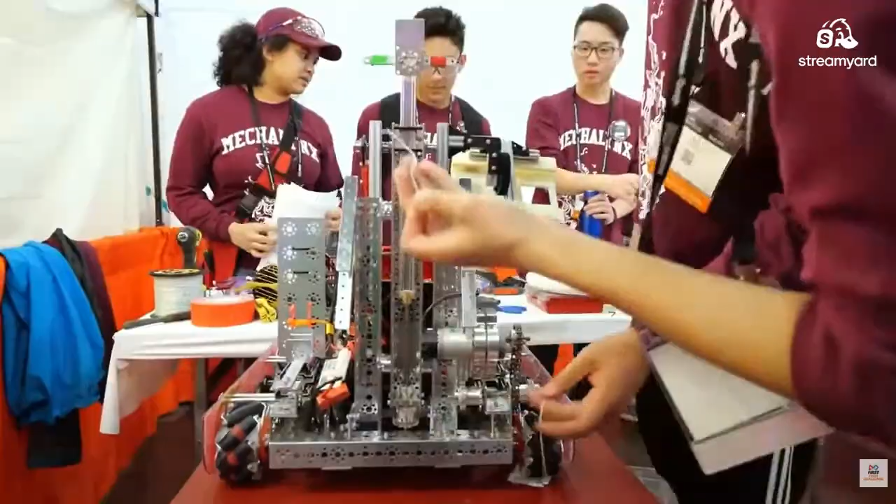Every year you also learn more and more about coding, so then your code's gonna get better and better. Personally, I do not learn hearing about it, but hands-on is just go into it. Instead of saying, oh, I know how to build this robot, I can say, I built this robot.

In First Tech Challenge, students are developing a broad range of skills: manufacturing, hardware, troubleshooting. But there's also a lot of things that you learn that you wouldn't necessarily think about, like people skills, problem-solving skills, helping one another, helping other teams.

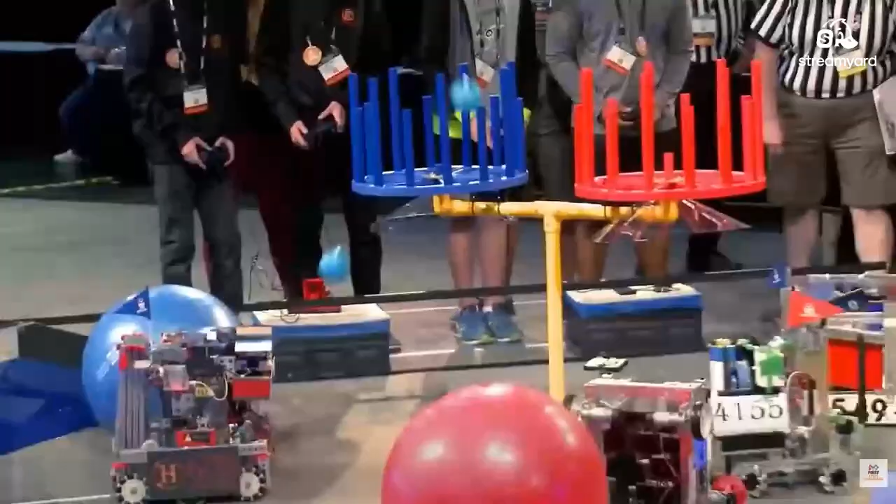The program draws so many students that come in who just want to do the marketing, who just want to do fundraising. And that's a great thing that the kids learn very early on. The model of FIRST has provided incredible opportunities for the students to interact with professionals.

Whenever I asked my mentors a question, they always flipped the question around and asked, where would you find the answer to that question if I weren't here? They slowly built my confidence up so much more to a point where we weren't asking them questions, we were just going.

Each team has to compete at a local event, win awards at the local event, and then they're able to move on to the First Championship.

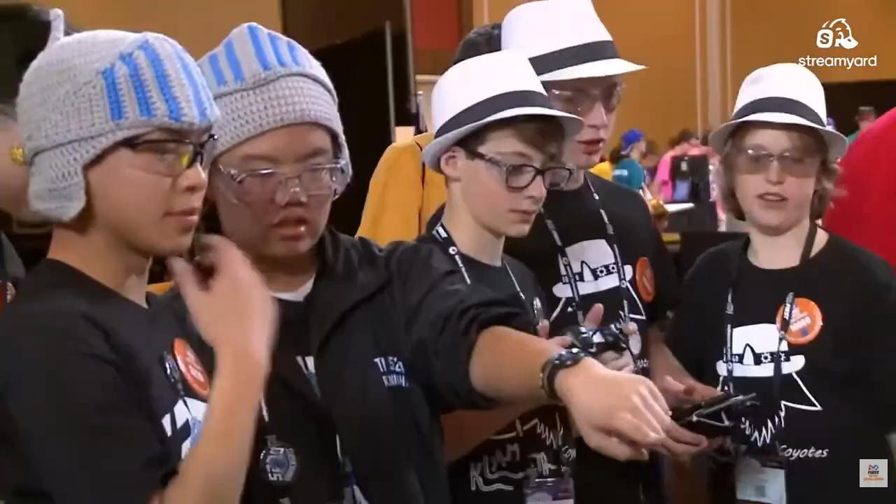You walk into the room and there's that smell. The smell of robots. There's different languages, different culture. It's just the best thing ever.

There are scholarships for colleges, universities, as well as technical programs. I think it's incredibly important for youth to see careers in science and engineering as a possibility for them.

First Tech Challenge is like an avenue for me to express my creativity with like-minded individuals that later become my friends through the program.

First, in one word: wow. Fun! First is inspiration. First is amazing. First is hope.

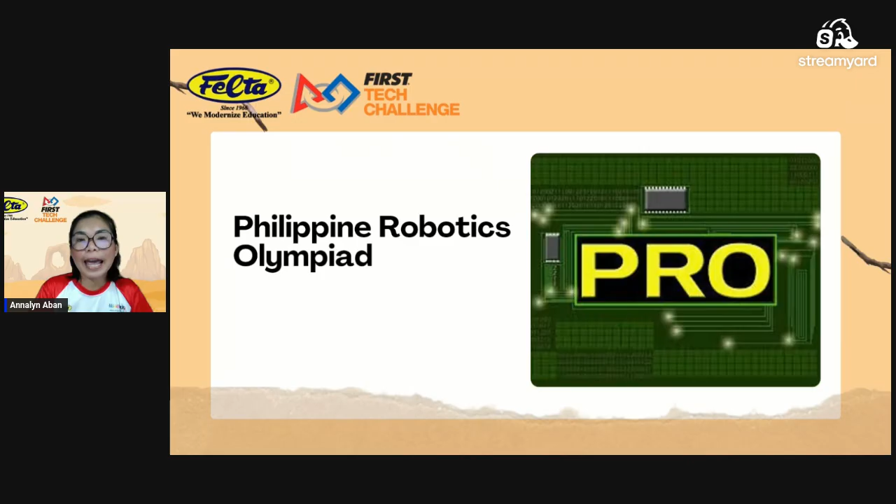Now, to help teams begin their FTC journey, we are also introducing the FTC starter bot for this season's team. We'll discuss that thoroughly later on. So it's bigger bots, but technically to start up, there is a starter bot as well.

Very challenging, but it's worth it. Yes, definitely po, it's true.

So, to help teams begin their FTC journey, because we're talking about bigger bots now, we will be introducing the FTC starter bot as well. Every year there is a season team, but later on we'll discuss that thoroughly. The starter bot that we're going to use, we'll showcase that later.

The starter bot serves as the foundation for teams to better understand the basics of FTC robot design, programming, movements, and game strategy. It's always designed to guide students and mentors as they explore the mechanics and engineering concepts behind the competition.

For new teams, the starter bot we're going to showcase later will provide an excellent starting point to learn how FTC robots are built and how they can be adapted to perform game tasks during the exhibition challenge. This initiative will support our goal of making First Tech Challenge more accessible,

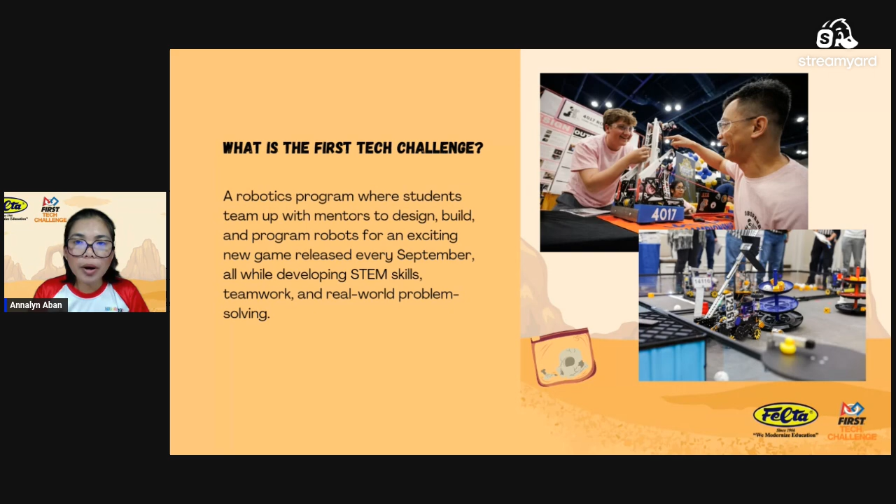In this First Tech Challenge, students are encouraged not only to create functional robots, but also to think critically. They need to solve real problems, communicate effectively, and collaborate as a team. Every season presents new challenges that push teams to continuously improve their design, strategies, and technical skills. Beyond the competition itself, FTC helps develop valuable STEM knowledge, leadership skills, confidence, creativity, and perseverance - skills that are important both inside and outside the classroom. Most importantly, FTC creates opportunities for students to learn by doing, to explore future careers in technology and engineering, and to become part of a global community of innovators and change makers.

So for the 2025 and 2026 season, teams around the world take on the challenge called Decode. It's almost done, but as I've mentioned, we just wanted to kick it off so that we could share it with the Philippine community. This season's game invites students to explore stories, discovery, and innovation connected to artifacts and human history through an exciting STEM and robotics experience - because it's Decode.

It was inspired by exploration and discovery, where teams work together to design robots capable of completing different game objectives while applying creativity, engineering, programming, and strategic thinking. Through this season, Decode challenges students to look deeper, to think critically, and to collaborate effectively as they solve problems inside the competition field. Teams experience hands-on learning while developing important skills in robotics. This year's challenge continues the mission of FIRST, where we want to inspire young people to become future scientists, engineers, innovators, and leaders through engaging and meaningful robotics experiences.

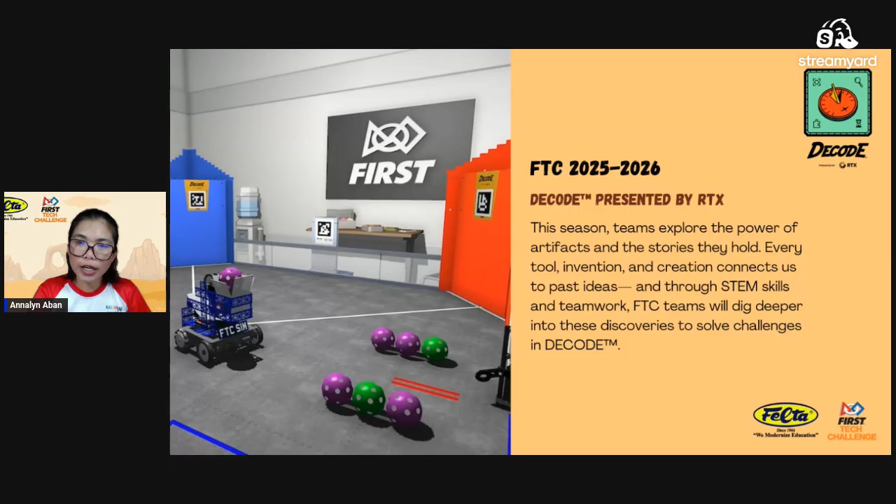Since we have an overview of First Tech Challenge, let's talk about some of the essential materials and equipment needed to get started. What are those things that we need to have in order to start joining the program? To begin building and preparing your robot for the competition, teams will need key components such as the starter bot. Here in the Philippines, we have the FTC starter kit - the Studica FTC starter kit - and the Rev controller and power bundle. We're going to explore those electronic components thoroughly, but if you wanted to clearly understand what you need to begin, here's the key.

This FTC starter kit will provide the foundational mechanical parts needed for robot construction - structural components, wheels, hardware, motors, and other essential building materials that the team can use to design and assemble the robot. Right after the starter kit, you also need the Rev controller and power bundle, which contains the main electronics and control system responsible for powering, programming, and operating the robot during matches.

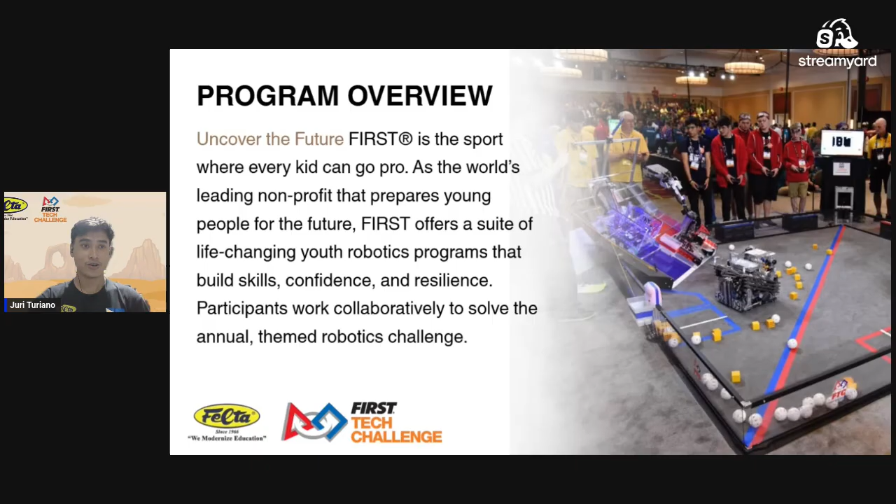Before I describe this year's season in words, I want to let First do it for you. This is the official reveal video for the 2025 to 2026 FTC season, Decode, presented by RTX. As you watch, I want you to pay attention to three things: the game field layout, the game elements the robots are interacting with, and the types of mechanisms you see on the competing robots. We'll unpack all of that right after.

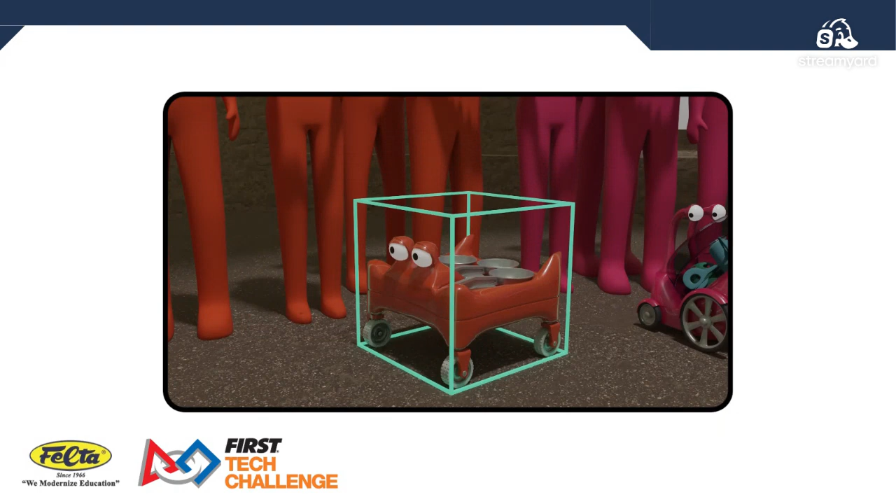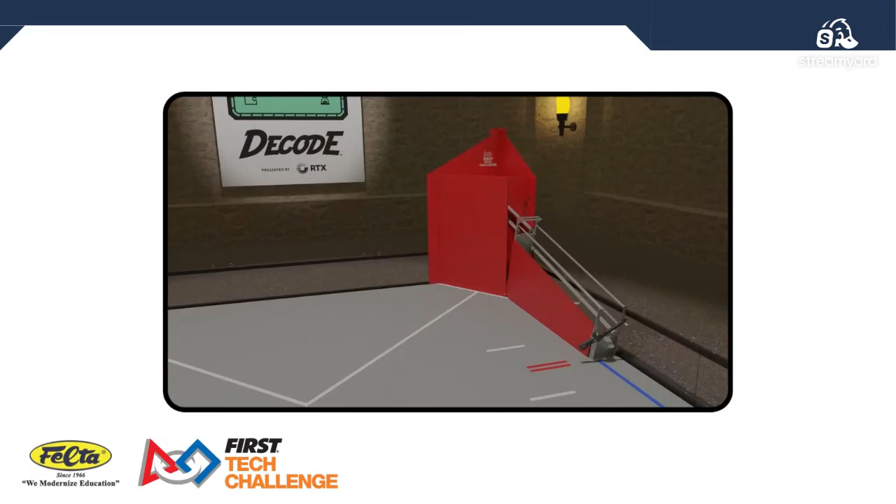Welcome to the First Tech Challenge 2025-2026 season game, Decode, presented by RTX. Decode is played by 4 randomly selected teams, 2 per alliance. Your opponent for one match may be your partner for another. Robots must be built to meet the specifications in the competition manual and fit within an 18-inch sizing cube. Robots and their extensions must remain within the 18-inch sizing cube until the end game. The game is played on a 12-foot square playing field with a foam tile floor and 1-foot-high walls. On the playing field is a red alliance goal and a blue alliance goal. At the exit of each goal is a classifier ramp and a gate. April tags are located on the goal to assist with targeting. On the field, there are 24 purple artifacts and 12 green artifacts. Robots start each match in one of 2 locations and can hold up to 3 artifacts.

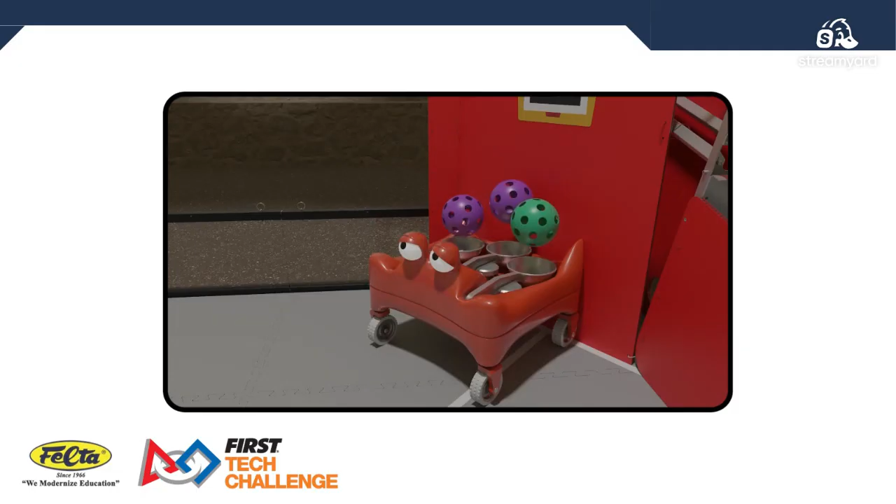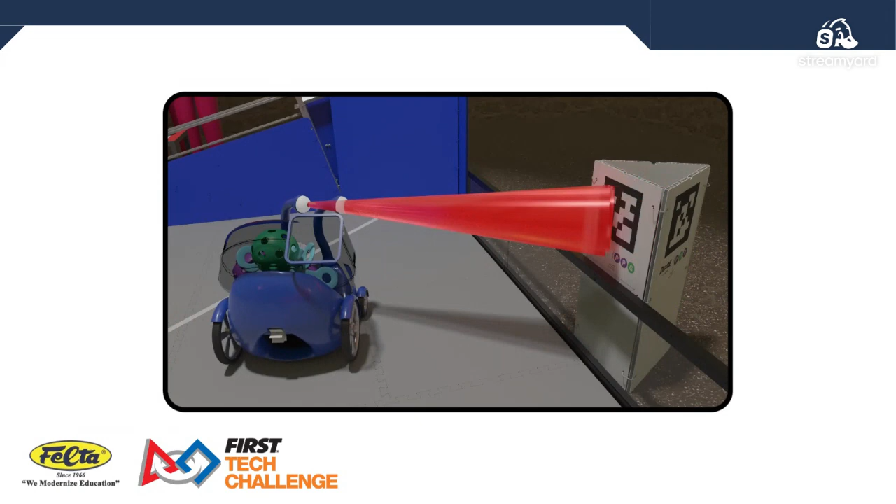At the start of each match, a motif made up of 3 artifacts is randomly selected and indicated on the obelisk. During the first 30 seconds of the match, robots are autonomous. Robots can use sensors to decode the motif, leave the starting line, and score artifacts in the goal.

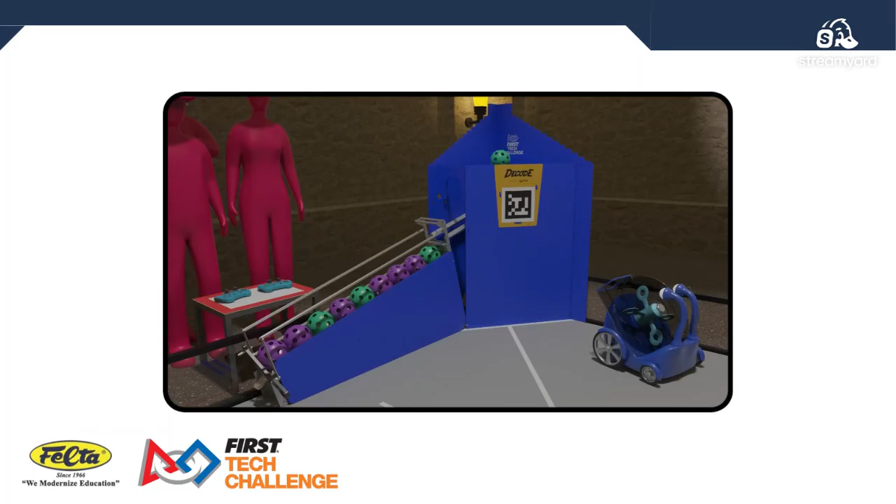Artifacts that enter the goal and exit to the classifier ramp earn points. Once the classifier is full, any additional overflow will score, but will earn fewer points. At the end of auto, alliances earn additional points if the artifacts in the classifier match the motif pattern.

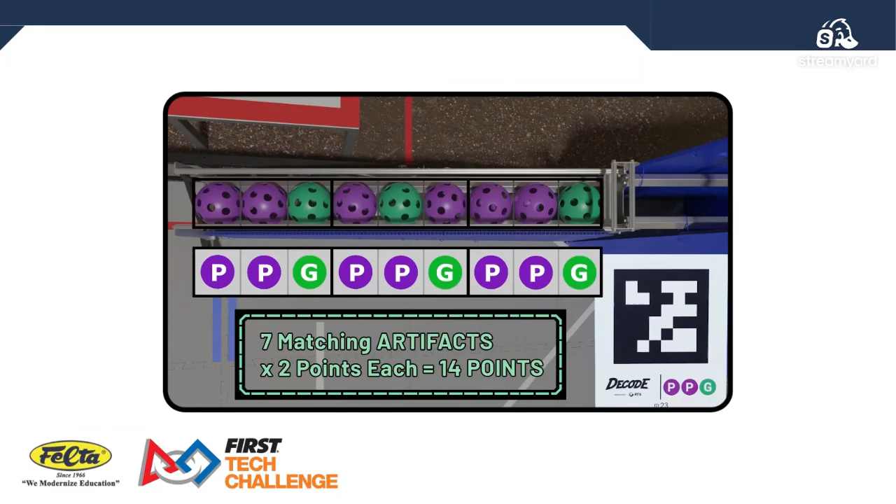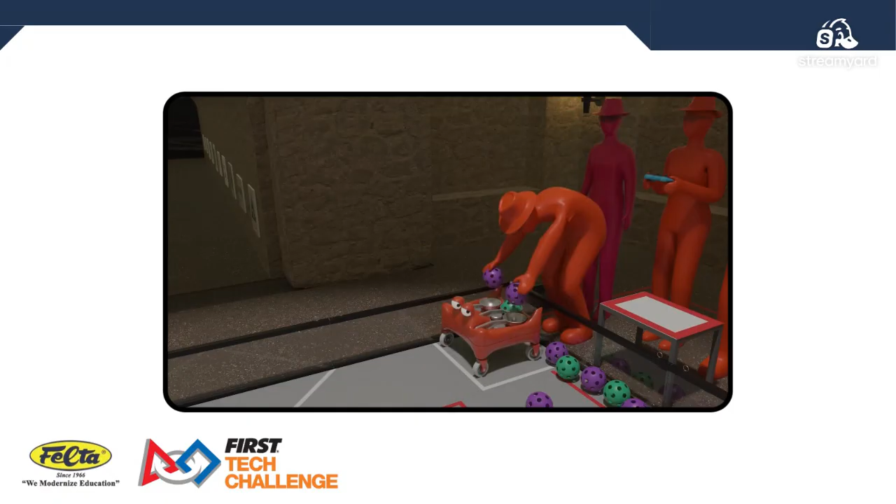During the following 2 minutes of the match, drivers control their robots. Robots continue to score in their goal, open the gate to clear the classifier, and collect artifacts from their human player. Alliances that score enough artifacts in their goal throughout the match will earn an additional ranking point.

The last 20 seconds of the teleop period is the endgame. Robots continue to score to fill their classifier to form the motif pattern. As time runs out, robots race to their base where they can expand in height. Points are awarded to robots partially in their base, and even more points are awarded to robots fully in their base. If both robots fit within their base, the alliance receives bonus points.

An alliance that can earn enough points from moving in auto and returning to their base will receive an additional ranking point. The alliance that earns the most points overall wins the match and will earn 3 ranking points. This has been a summary of this season's game, Decode, presented by RTX. For complete rules, please read the competition manual, and always remember to demonstrate the FIRST ethos of gracious professionalism. Good luck, teams, and have a great season.

All right, now that you've seen it, let's talk about what you just watched. Because everything in the video has a direct implication for what we build. The game is called Decode, and at its core, it challenges teams to collect game elements from the field, transport them, and score them into specific targets. Some by placement, some by launching.

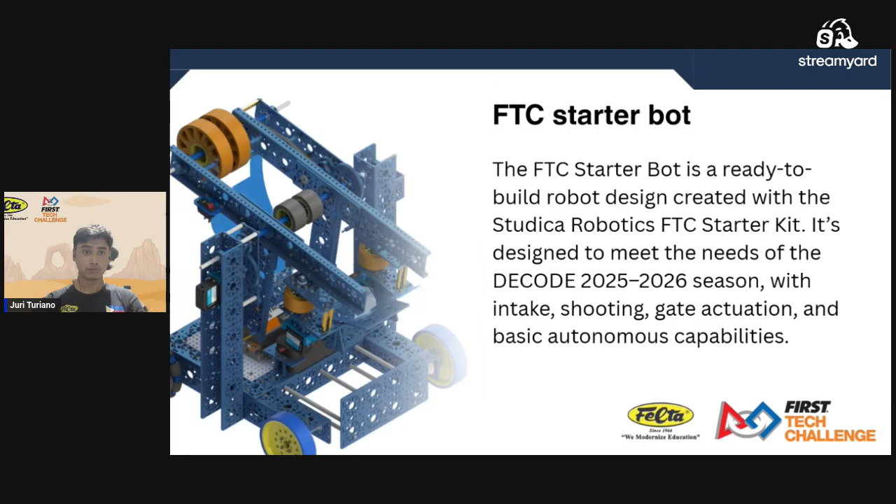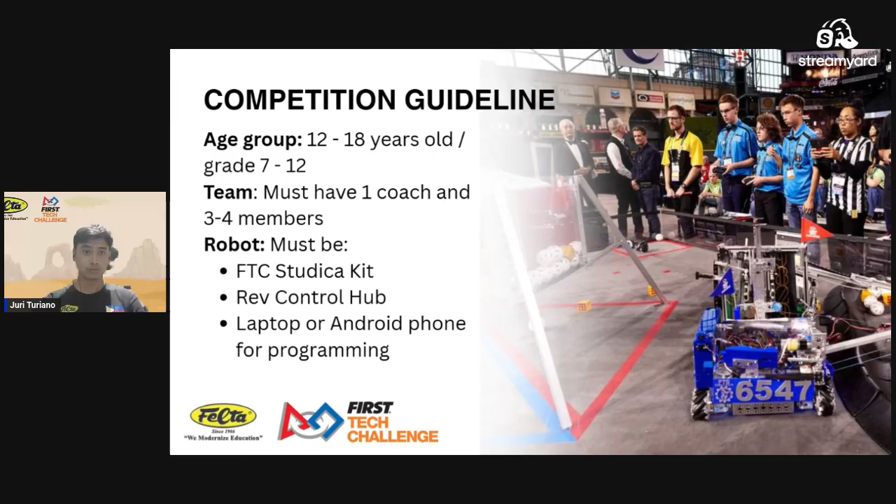and electronics. So let's begin with the electronics, the components that power and control the robot. These are perhaps the most critical parts of the kit because without working electronics, the robot simply does not function. The primary power source for the robot is a 12-volt

3000 milliamp hour nickel metal hydride, or NiMH, battery pack. This is a rechargeable battery that provides electrical energy for all motors, servos, and control electronics on the robot. A fully charged battery is essential for consistent performance in competition, and coaches should establish a charging routine. Batteries should be charged after every practice session and allowed to cool before storage.

The kit also includes one NiMH battery pack charger. This is not a fast charger; it charges slowly and safely, which extends the battery lifespan. Teach your students to never leave a battery on the charger unattended for extended periods and never use a damaged battery. Battery safety is serious. It should be part of your team's standard operating procedures.

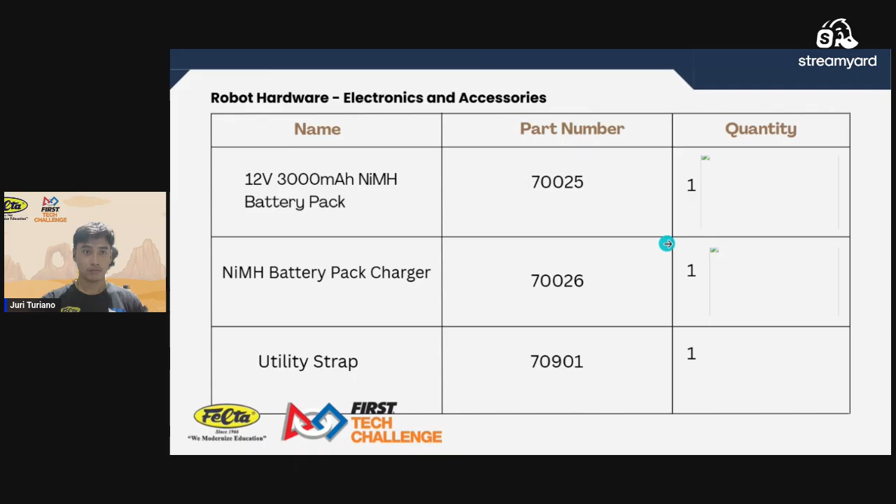The on and off switch kit controls the power of the entire robot. FTC rules require that all robots have an easily accessible power switch, and this kit provides that switch along with the wiring harness needed to install it. Make sure students understand where the power switch is and how to turn the robot off quickly, and this is a safety skill.

The smart servo programmer and its companion 6-volt DC battery holder allow coaches and students to configure servo motors independently of the robot's main control system. This is extremely useful for calibrating servo positions before installation. You can test the servo's range of motion and center point without needing a full robot to be powered and programmed. We will discuss servos in more detail when we reach the actuator section.

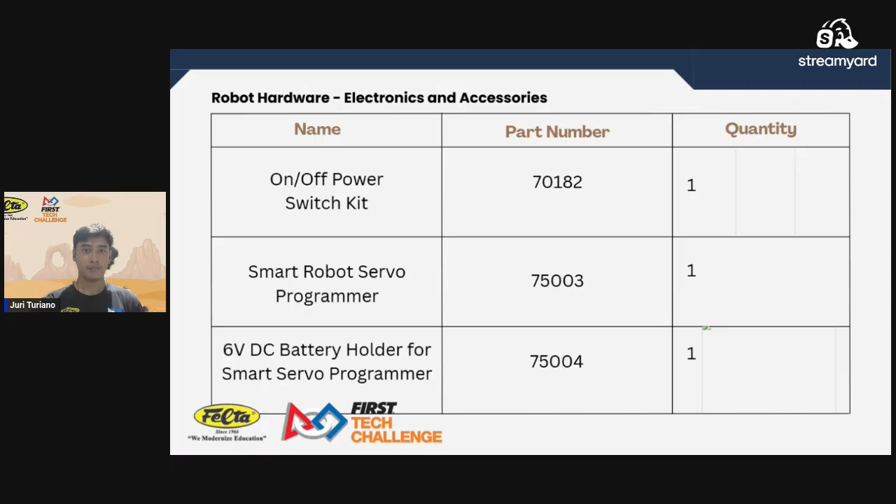Moving on to cable management components, these might seem unglamorous, but experienced teams know that a well-wired robot is a reliable robot. Cable failures are among the most common causes of robot malfunctions at competitions, and almost all of them are preventable. The XT30 female to PowerPole cable connects the battery pack to the robot's REV Control Hub via a PowerPole connector. This is the main power feed. Everything downstream depends on this cable being secured and undamaged. Inspect it before every practice.

The PowerPole to JST-VH cables, four of them, connect from the control hub motor ports to each of the four drive motors. The expansion encoder cables, also four, carry encoder data back from the motors to the hub, allowing the software to track each motor's rotation count precisely. Accurate encoder data is what makes autonomous routines possible.

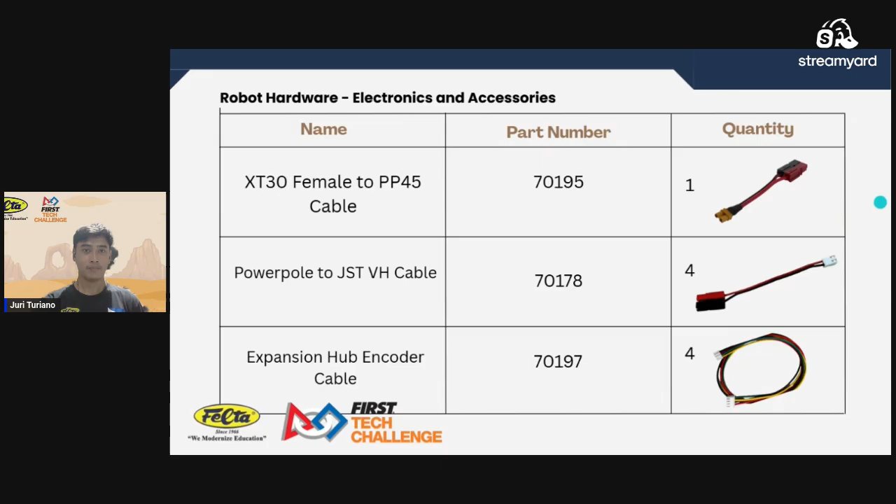The rubber grommets protect cables where they pass through holes in the robot's metal frame. Without grommets, metal edges can cut through cable insulation over time, eventually causing short circuits. Always use the grommets whenever cables pass through structural holes. The 100 pull zip ties are cable management tools. Use them generously to bundle and route cables away from the moving parts. A cable caught in a gear or wheel can disable the robot instantly.

The polycarbonate perforated sheets serve as the mounting panels for electronic components. The control hub, sensors, and other devices attach to these panels, which are then secured to the robot's frame. The perforation allows for flexible positions and easy attachments.

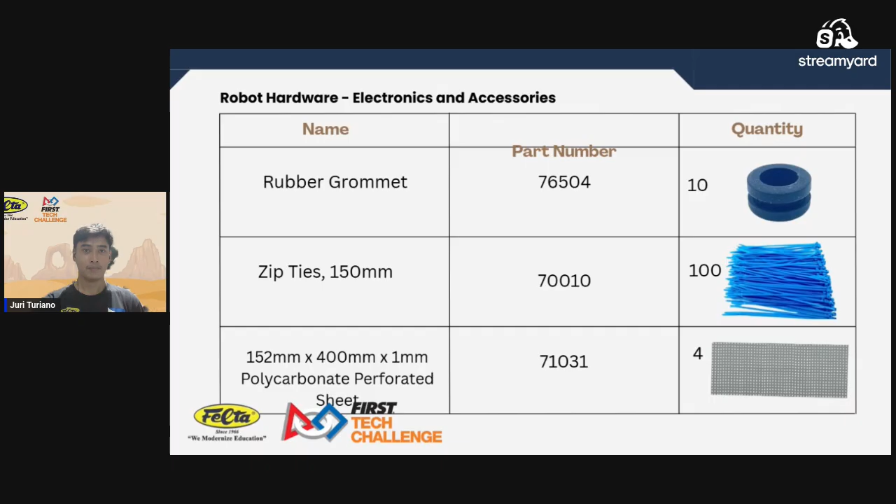The servo extension cables and the servo Y-split cable extend servo signal wires to reach servos mounted farther from the control hub. And the Y-split allows one signal port to control two servos simultaneously, useful for mechanisms that require synchronized servo movement.

Every kit includes a set of tools, and understanding the purpose of each one helps coaches ensure students are using the right tool for the right job, which reduces stripped screws, damaged parts, and frustration. The black robot toolbox keeps all the tools organized in one place. Encourage students to always return tools to the box after use. A missing hex key at the wrong moment during a build session wastes time and creates stress.

The 2.5 millimeter hex ball end screwdriver is one of the most frequently used tools in the kit. The 2.5 size matches the socket of M3 screws, which are used throughout the robot. The ball end allows the driver to engage the screw at an angle, which is invaluable when working in tight spaces where a straight driver cannot reach.

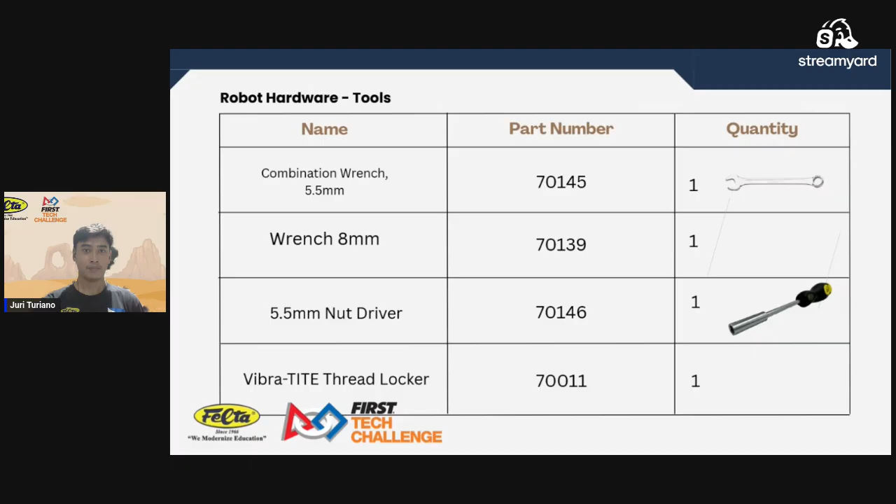Perhaps the most important consumable in the tool section is the thread locker. This is a low strength thread locking compound applied to screws in high vibration areas of the robot, particularly drivetrain components and shooter mechanisms. Without the thread locker, screws will gradually back out during operation, leading to structural failures that are difficult to diagnose mid-competition. Teach students to apply a small drop, not a large amount. Less is more with thread locker.

Let's move on to the hardware channels, the physical skeleton of a robot. The primary structural element in the Studica system is the U-channel, an aluminum extrusion with a U-shaped cross-section perforated with holes at regular intervals for fastener attachment. U-channels come in multiple lengths: 336 millimeters, 288 millimeters, 192 millimeters, 96 millimeters, and 48 millimeters.

Longer channels form the main frame members: the chassis rails, the elevator structure, the arm assemblies. Shorter channels serve as connectors, gussets, and end caps. Understanding which length to use where is part of the engineering design process.

In addition to U-channels, the kit includes low-profile U-channels in 432 mm and 192 mm lengths. Low-profile channels are shallower than standard channels, allowing them to fit in space-constrained areas of the robot where a standard channel would be too tall. They are commonly used for electronics mounting platforms and as secondary frame members.

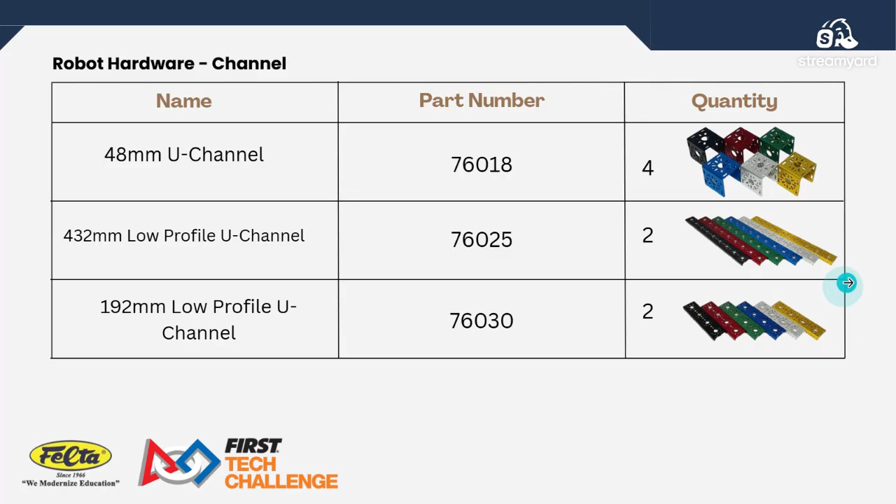Now let's move on to beams. Complementing the U-channels are the structural beams. You have two types: L-beams and square beams. L-beams, available in 48 mm and 96 mm lengths, have an L-shaped cross-section that makes them ideal for creating perpendicular connections between channel members. They add rigidity at corners and joints where two channels meet at 90 degrees.

Square beams in 48 mm, 144 mm, and 288 mm sizes have a square cross-section and are used for internal frame bracing. Where U-channels form the outer structure, square beams often add internal stiffness that prevents the frame from flexing or racking under load. A robot that flexes during operation will have inconsistent mechanism performance. A stiff, well-braced frame is the foundation of a reliable robot.

From an educational standpoint, beams and channels together give students hands-on experience with structural engineering concepts: load paths, triangulation, moment arms, in a tangible, immediate way. When a student notices that adding a beam makes the robot noticeably stiffer, they understand structural engineering in a way that no textbook diagram can fully convey.

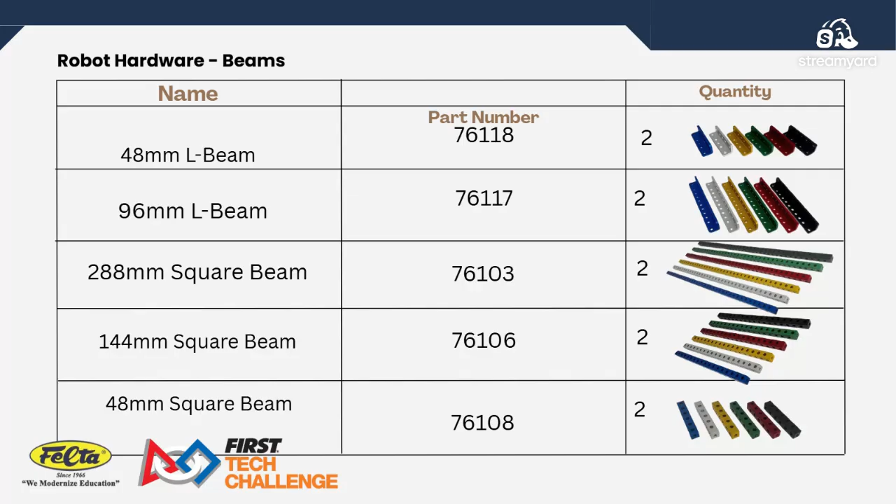Now for the brackets. Brackets are the connectors that join structural members together. The Studica system includes a rich variety of bracket types, each serving a specific geometric purpose. Flat brackets in sizes ranging from 144 mm to 288 mm are used to connect two structural members in the same plane. Imagine joining two channels end to end or reinforcing a long span with a parallel plate.

The 90-degree bracket creates right angle connections between channels oriented perpendicular to each other. The T-bracket creates a three-way joint, useful wherever a cross member meets a mainframe rail.

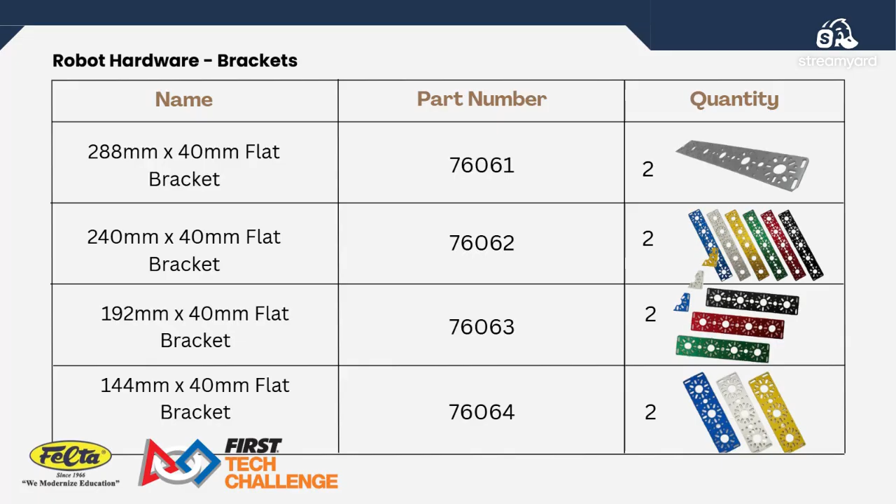Inside U brackets fit inside the channel cavity and allow attachment without adding external bulk, useful in tight-fitting assemblies. L brackets and inside L brackets serve similar functions but with different orientations, giving students flexibility in how they approach corner connections. Battery clips are purposely built brackets designed to hold the battery packs securely within the robot frame.

For new coaches, a common mistake is to underestimate the importance of bracket selection. Students sometimes reach for whatever bracket is nearest rather than the one that is geometrically correct. This leads to misaligned components, extra stress on fasteners, and robots that don't perform as designed. Taking the time to discuss bracket selection with students before the build begins saves significant rework time later.

It is also worth noting that the brackets in this kit are made from anodized aluminum. They are lightweight but strong. However, they are not indestructible. Brackets that are over-torqued, improperly loaded, or repeatedly removed and reinstalled will eventually fatigue. Teaching students to handle hardware with care is part of the engineering culture you are cultivating.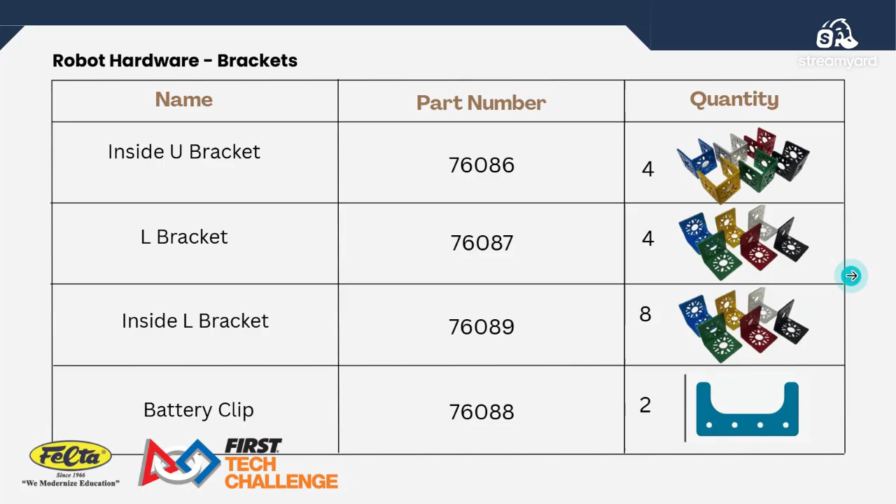Mounting plates are specialized structural components designed to hold specific hardware, primarily motors and servos, in precise, secure positions. Getting motor and servo mounting right is one of the most important mechanical tasks in the build, because motors that shift position during operation will misalign gears, miss tension belts, and introduce mechanical failures.

The motor clamp kit uses a cylindrical clamp to hold the body of a Maverick DC motor. The Clover mount plate is an alternative mount that bolts directly to the motor's faceplate, providing a more rigid, lower profile attachment. End piece plates cap the ends of channels where motors are installed, providing additional structural support to the motor mount assembly.

For servos, the kit includes servo standard front mounts and servo mount flat plates. These components allow the servos to be positioned precisely in any orientation needed by the mechanical design. Proper servo mounting matters, especially for the gate and intake mechanisms in the starter bot, where precise servo positioning directly affects the robot's scoring capability.

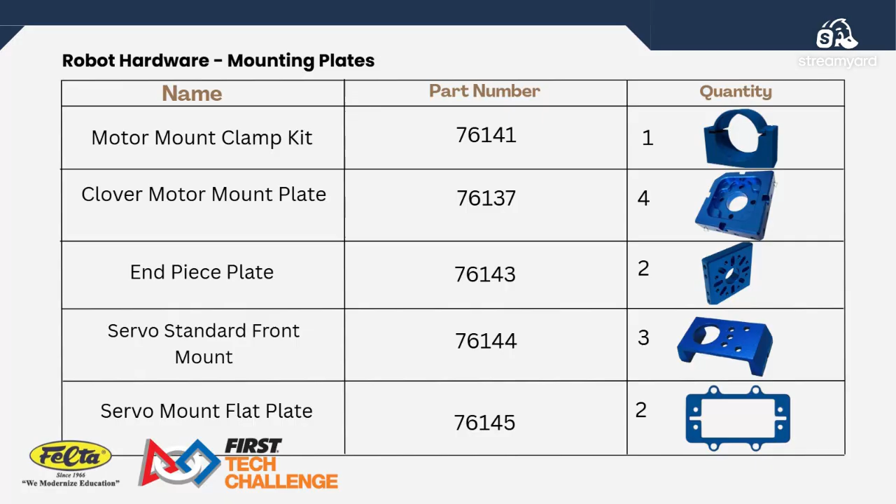As coach, pay particular attention to motor mount alignment during the build. Take the time to measure and verify that motors are parallel to their respective shafts and that there is no lateral stress on the shaft couplings. Ten minutes of alignment work during the build prevents hours of troubleshooting at competition.

Now let's move on to the hex shafts. Hex shafts are rotating axles that transmit mechanical power throughout the robot. The Studica system uses 6 mm hex shafts, axles with a hexagonal cross-section rather than a circular one. The hex shape is a key feature; it prevents slipping between the shaft and whatever it is mounted on, unlike a round shaft which relies on friction or set screws.

The kit includes shafts in five lengths: 35 mm, 70 mm, 96 mm, 140 mm, and 432 mm. Selecting the correct shaft length for each application is a mechanical engineering decision. Too short and there is not enough bearing support, the shaft will flex under load. Too long, and the shaft extends unnecessarily, adding weight and creating collision risks.

The 35 and 70 mm shafts are typically used for short axle runs, small gear connections, idler pulleys, and tight mechanism joints. The 96 mm and 140 mm shafts serve as wheel axles and primary mechanism drives. The 432 mm shaft is notable for its length.

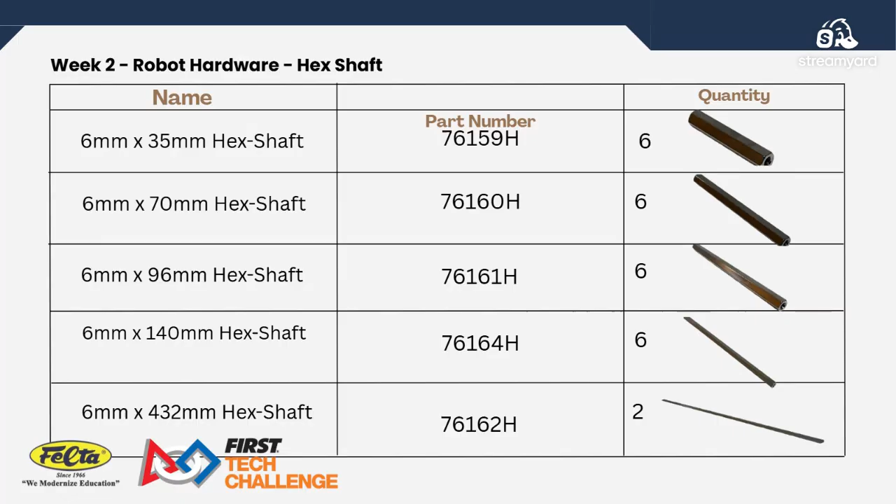Now let's move on to motors and actuators. Actuators are components that create motion, the muscles of the robot. The starter kit includes two types of actuators: DC motors and servo motors. The DC motors in this kit are the Maverick motors from Studica, equipped with planetary gearboxes. Planetary gearboxes are used because they are compact, efficient, and offer a wide range of gear ratios.

The kit includes two gear ratio options. The 3.7 to 1 ratio delivers high rotational speed with moderate torque, ideal for shooter wheels which need to spin fast to launch game elements. The 50.9 to 1 ratio delivers high torque at lower speed, ideal for the drive wheels, where pushing power and reliable acceleration matter more than raw speed.

Teaching students the relationship between gear ratio, torque, and speed is one of the most valuable concepts FTC offers. The basic principle: increasing gear reduction multiplies torque but divides speed proportionally.

A 50.9 to 1 gearbox on a motor spinning at 6,000 RPM produces an output of approximately 118 RPM, much slower. But with 50.9 times the turning force, students who understand this can make intelligent decisions about mechanism design.

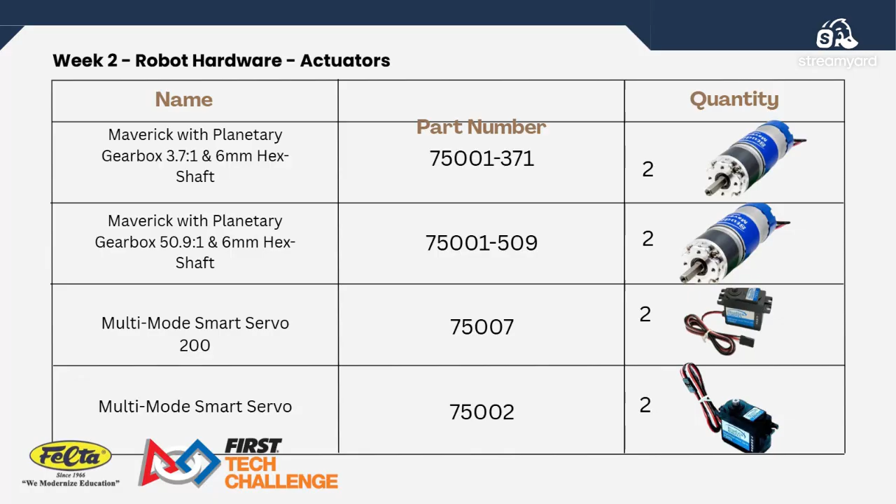Now for the standoffs and spacers. Standoffs and spacers are the positioning components of the robot. They control the distance and alignment between structural and mechanical elements, small details that have a significant impact on performance.

Standoffs in 25 millimeters, 52 millimeters, and male-to-female configurations create fixed separations between structural layers. The electronics mounting panel, for example, is typically elevated above the main chassis frames using standoffs, creating clearance for wiring and components underneath. Male-to-female standoffs allow stacking, combining two standoffs to achieve a custom height.

Screw spacers in 1 millimeter and 2 millimeters thickness are used.

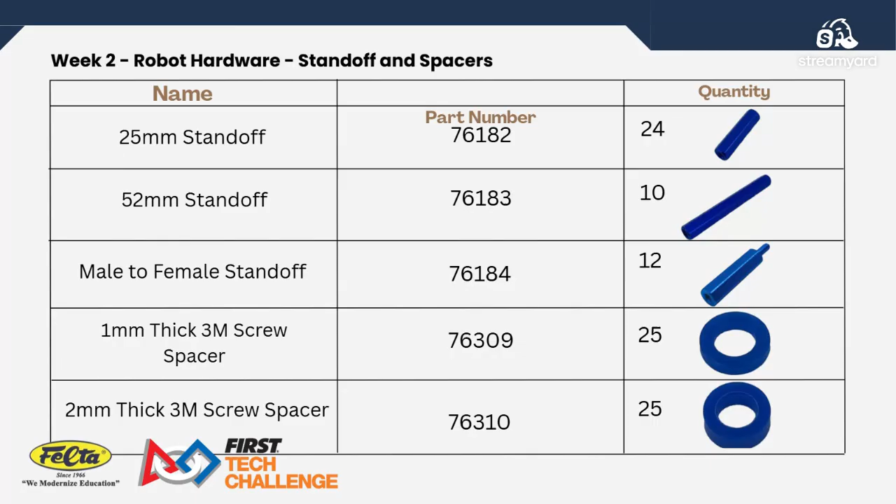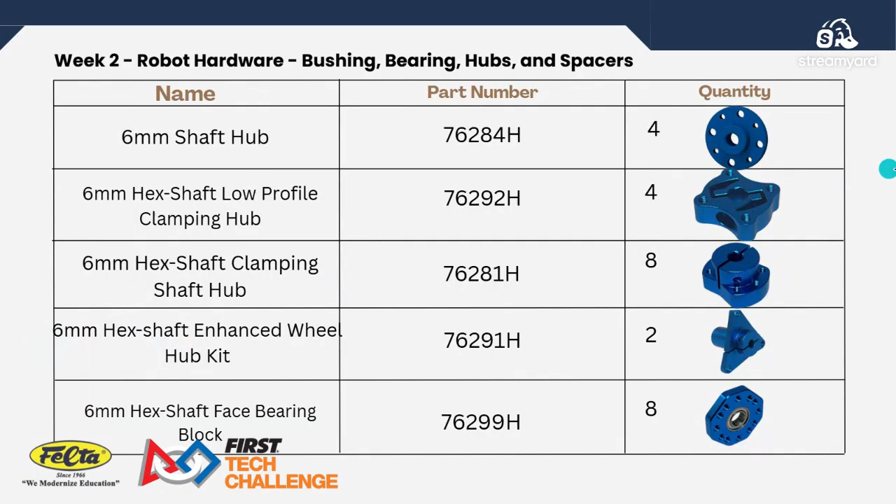Let's skip this part, for the connectors, this is the hub. Let's move on to the main controller hub.

The main component, or the control hub, the main brain for the FTC starter kit, is the REV. Now let's talk about the control system, the brain of the robot. This is how your students will communicate with the robot, send commands, and receive feedback during a match.

In FTC, teams have the option to use Android smartphones as part of the control setup, specifically a smartphone that can serve as a driver station or the robot controller, or in some configurations both. Let's break those two roles down, because understanding the distinction is important for coaches and students.

The driver station is a device your drivers hold during a match. Think of it as a command center in the driver's hands. It runs the FTC driver station app, connects to the game controllers or gamepads, and sends commands wirelessly to the robot over Wi-Fi Direct.

For a smartphone to function as a driver station, it needs the FTC driver station app installed, and it will require an OTG, or on-the-go, USB adapter along with a USB hub to physically connect the gamepads. Without the OTG adapter, the phone cannot recognize the gamepad controllers.

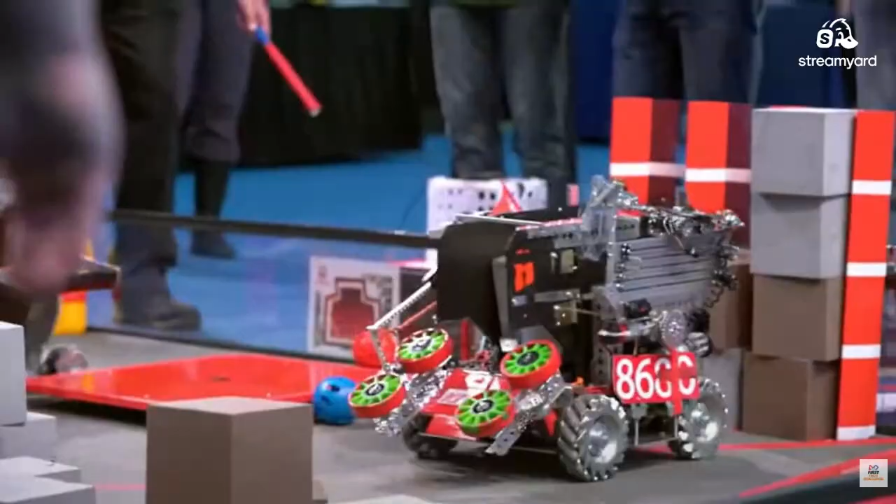Teams program robots in a variety of coding languages. Every year you learn more and more about coding, so then your code's gonna get better and better. Personally, I do not learn by hearing about it, but hands-on is just go into it. Instead of saying, oh, I know how to build this robot, I can say, I built this robot.

In First Tech Challenge, students are developing a broad range of skills: manufacturing, hardware, troubleshooting, but there's also a lot of things that you learn that you wouldn't necessarily think about. People skills, problem-solving skills, helping one another, helping other teams. The program draws so many students who just want to do the marketing, who just want to do fundraising. And that's a great thing that the kids learn very early on.

The model of FIRST has provided incredible opportunities for the students to interact with professionals. Whenever I ask my mentors a question, they always flip the question around and ask, where would you find the answer to that question if I weren't here? They slowly built my confidence up so much more to a point where we weren't asking them questions, we were just going.

Each team has to compete at a local event, win awards at the local event, and then they're able to move on to the FIRST Championship.

You walk into the room and there's that smell, the smell of robots. There's different languages, different culture. It's just the best thing ever. There are scholarships for colleges, universities, as well.

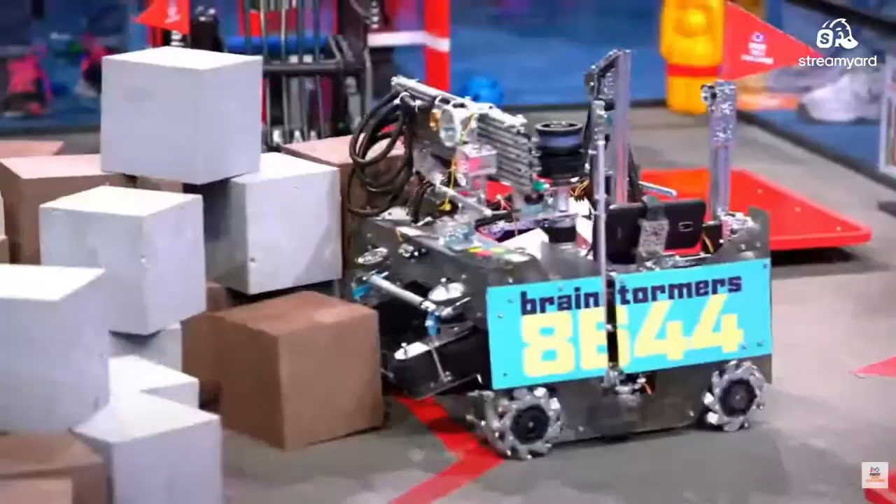Teams use a reusable kit to program robots in a variety of coding languages. Every year you also learn more and more about coding, so then your code's gonna get better and better. Personally, I do not learn by hearing about it, but hands-on is just go into it. Instead of saying, oh, I know how to build this robot, I can say, I built this robot.

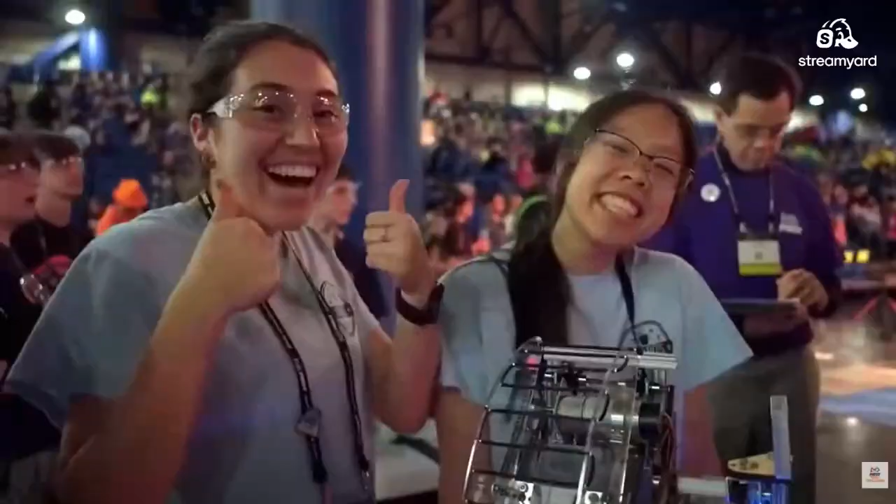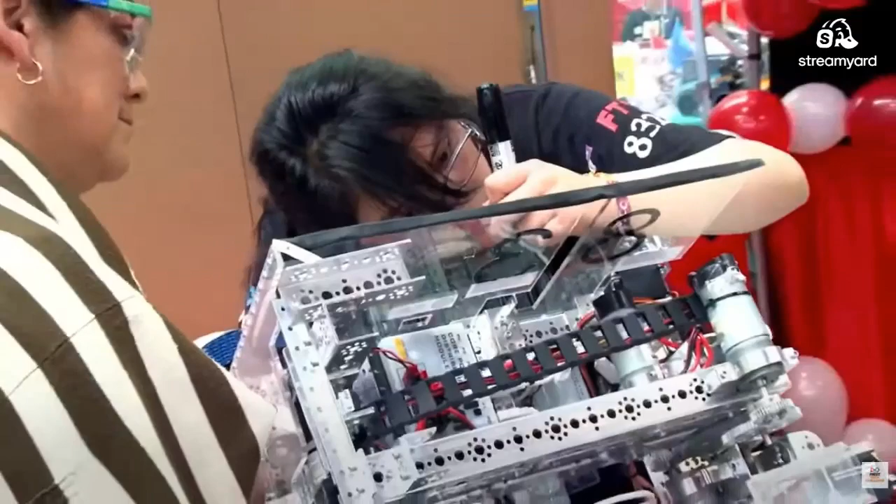In First Tech Challenge, students are developing a broad range of skills: manufacturing, hardware, troubleshooting, but there's also a lot of things that you learn that you wouldn't necessarily think about. People skills, problem-solving skills, helping one another, helping other teams. The program draws so many students who just want to do the marketing, who just want to do fundraising. And that's a great thing that the kids learn very early on.

The model of FIRST has provided incredible opportunities for the students to interact with professionals. Whenever I asked my mentors a question, they always flipped the question around and asked, where would you find the answer to that question if I weren't here? They slowly built my confidence up so much more to a point where we weren't asking them questions, we were just going. Each team has to compete at a local event, win awards at the local event, and then they're able to move on to the first championship.

You walk into the room and there's that smell, the smell of robots. There's different languages, different culture. It's just the best thing ever. There are scholarships for colleges, universities, as well as technical programs.

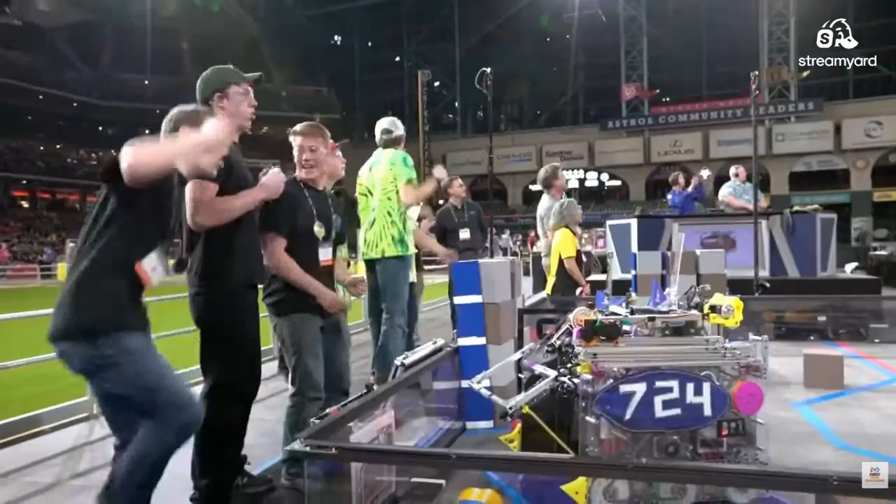I think it's incredibly important for youth to see careers in science and engineering as a possibility for them. First Tech Challenge is like an avenue for me to express my creativity with like-minded individuals that later become my friends through the program.

First, in one word: wow. And First is inspiration. First is amazing. First is hope.